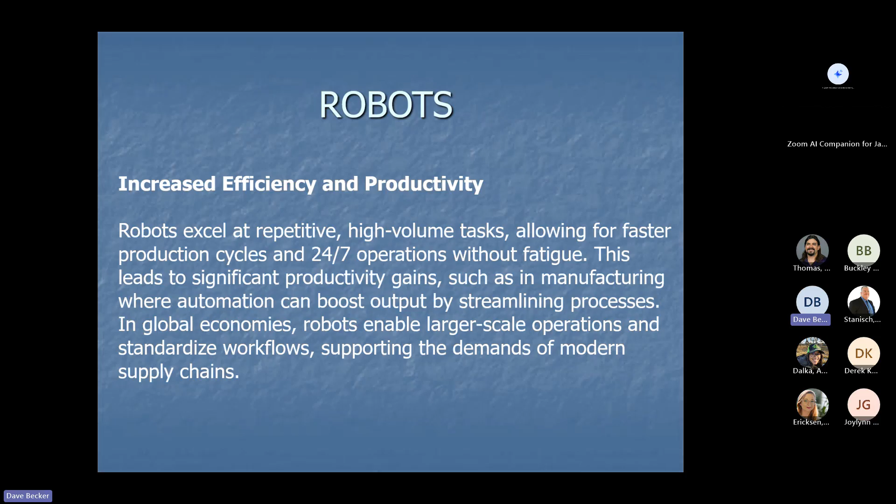And we're not only seeing automation and robots in this, but we're also seeing it with lasers as well now too. Many companies now have what they call lasers that run lights out. So they can program a laser to cut material over the weekends because the laser can now efficiently cut the parts, clean the table, and put a new sheet of metal on and go from there. So we're seeing more and more of this after-hours operation, if you will, in robotics as well.

Improve accuracy, quality, and consistency. Unlike humans, robots perform precise actions with minimal errors, reducing the defects and the waste in production. This results in higher quality products from electronics to pharmaceuticals. Their reliability ensures consistent output, which is crucial for industries like the automotive assembly plants in Detroit and around the world.

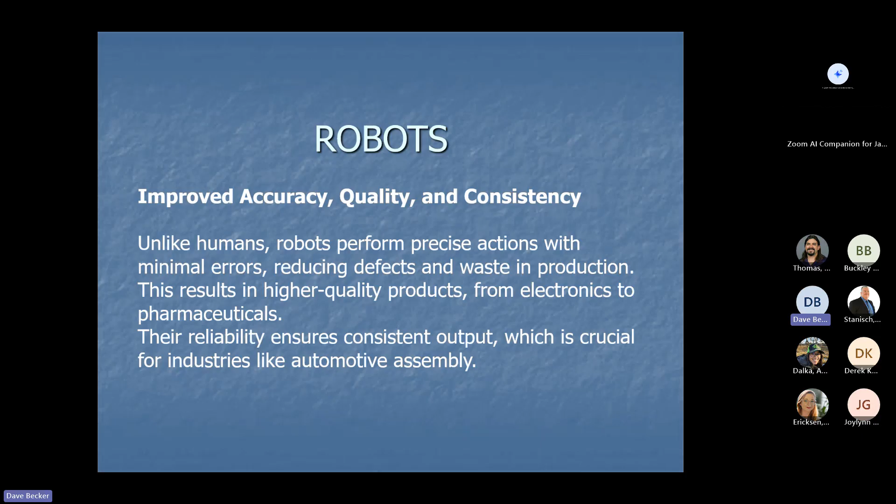Cost savings and economic growth. By lowering labor costs for routine work and minimizing material waste, robots reduce overall production expenses, which can translate into lower prices for consumers and broader economic benefits like shared income gains from capital investments. On a societal level, robotics drives economic expansion by cutting costs, increasing output, fostering job creation in tech and maintenance roles while spurring innovation.

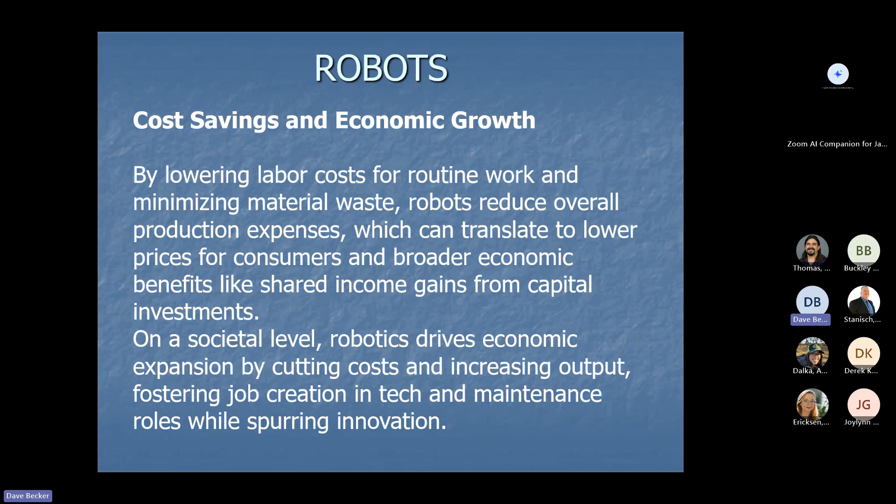So one of the ways that we do see this quite a bit is we hear from customers or people in the industry saying, hey, the robot's going to take my job. And actually, what ends up happening in most situations is the robot does perform the welding tasks or whatever that may be a lot faster. And we're finding that they need more people on the front end loading or on the back end unloading because the robot is moving so fast. So actually robotics, as we have found, has created more job opportunities.

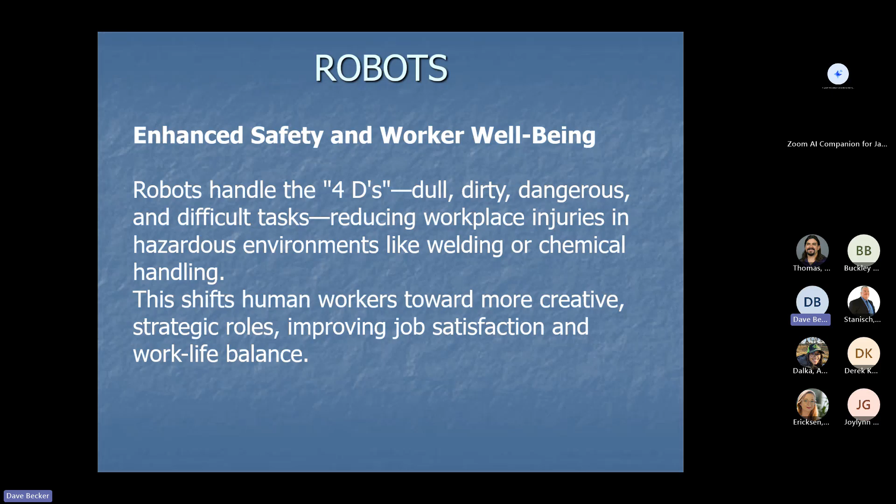Enhance safety and worker well-being. Robots handle the 4 Ds, which is dull work, dirty work, dangerous work, and very difficult tasks. Reducing workplace injuries in hazardous environments like welding or chemical handling. This shifts human workers towards more creative, strategic roles, improving job satisfaction and work-life balance. And like I said, this is where robots can get in and do the dirty work that was not fun for an employee to do in the past.

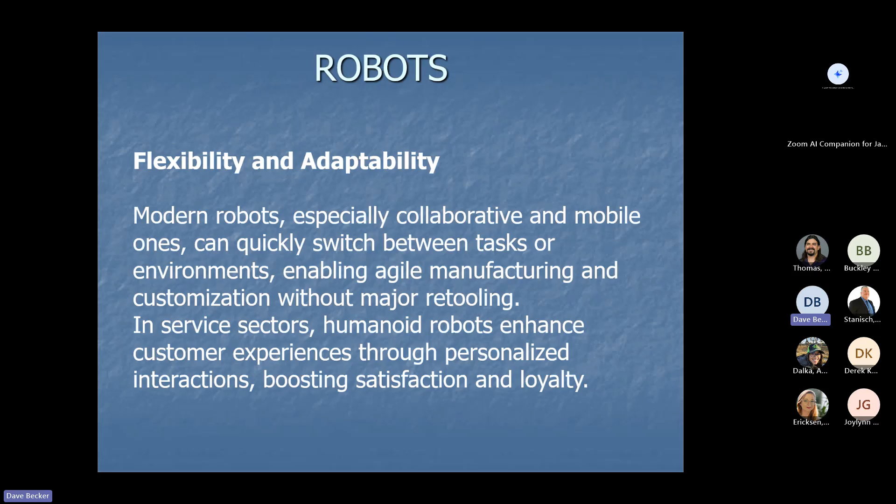Flexibility and adaptability. Modern robots, especially collaborative and mobile ones, can quickly switch between tasks or environments, enabling agile manufacturing and customization without major retooling. In service sectors, humanoid robots enhance customers' experiences through personalized interactions, boosting satisfaction and loyalty. So we're seeing more and more cobots doing material handling type stuff as we get further into the age of robots.

On a broader societal and environmental impact, robots contribute to sustainability by optimizing resource use and reducing energy consumption in operations.

We see a lot more of robotics in healthcare, in surgical precision. We're seeing it more in agriculture now for planting and the right amount of fertilizer, and quality of life globally.

While robots displace some routine jobs, their net effect is often positive when paired with reskilling programs. Adoption continues to grow with projections for even greater integration by the year 2030.

We do have one customer of ours, a very large customer, that would like to be, by 2035, 40% manual welding and 60% robotic welding. They feel that's where the market is taking them, especially with a lack of finding people that want to still do welding in this industry, in manufacturing.

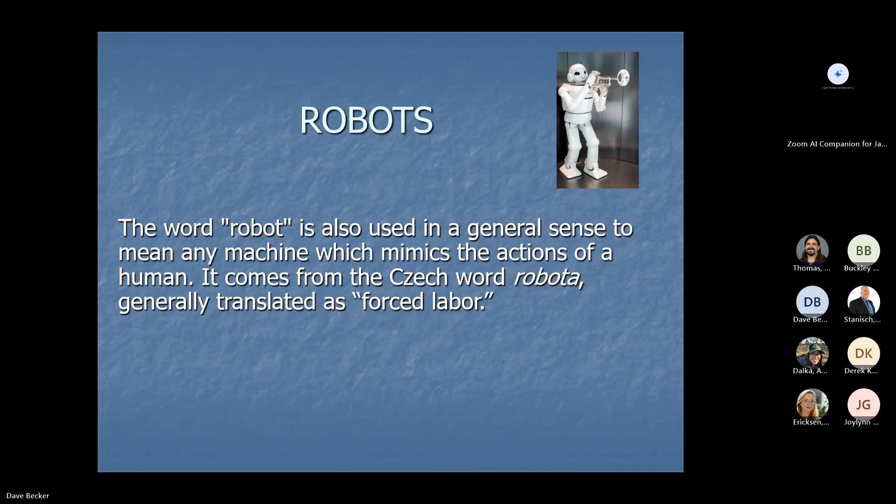The word robot is also used in a general sense to mean any machine which mimics the actions of a human. It comes from a Czech word, robota, generally translated as forced labor. So that's where you get the word robots from.

Most robots are designed for heavy, repetitive manufacturing work. They handle tasks that are difficult, dangerous, or boring to human beings. Robots are designed to do the same thing over and over again. So it's all about repeatability, welding that same joint time and time again.

For example, a robot might twist the caps onto a peanut butter jar on an assembly line. To teach a robot how to do its job, a programmer guides the arm through the motions using a handheld controller, which we call a teach pendant. The robot stores the exact sequence of movements in its memory and does it again and again.

So it's all about repeatability, and that's where we see the greatest success in a lot of applications where we put robotic welders in or material handling type stuff.

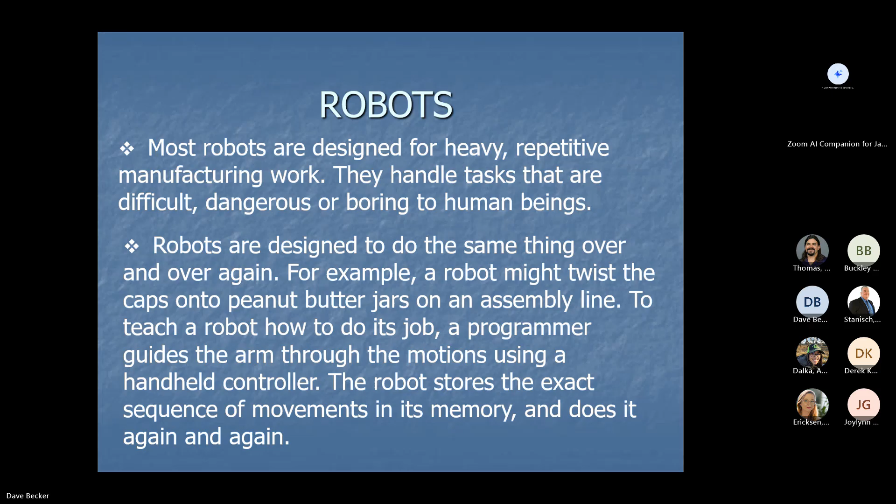Most robots work in auto assembly lines, building cars. Robots do the work more efficiently than human beings because they are so precise. They always drill in the exact same place every time, and they always tighten bolts with the same amount of force, no matter how many hours they've been working. So like I said, it's all about repeatability.

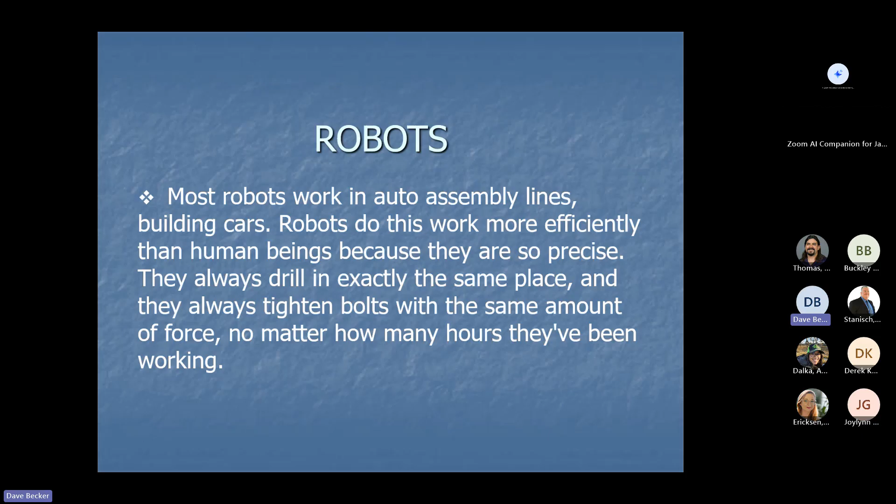So how robots kind of work: an industrial robot with 6 joints closely resembles a human arm. It has the equivalent of a shoulder, an elbow, and a wrist. Typically, the shoulder is mounted to a stationary base structure rather than a movable body. This type of robot has 6 degrees of freedom, meaning it can pivot in 6 different ways. A human arm, by comparison, has 7 degrees of freedom.

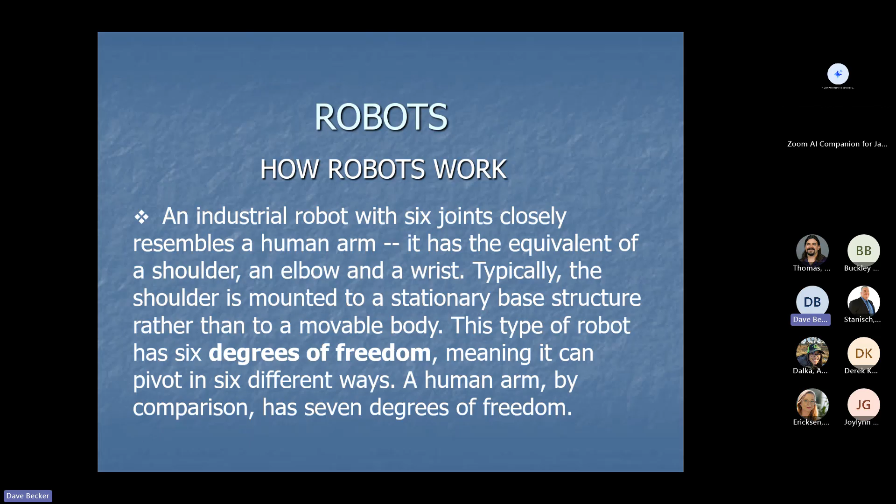A robot's servo motor, which is kind of what I would call the joint, often just called the servo motor in robotics, is a compact electromechanical device that provides precise control over angular and linear position, velocity, and acceleration. It's widely used in robots for tasks requiring accurate movement, such as arm joints, grippers, or camera pan tilt mechanisms. So the servo motors are very critical in robots, and you'll see some examples here.

I'll show too of how they precisely move the different sections of the robotic arm into place and in the same spot every time.

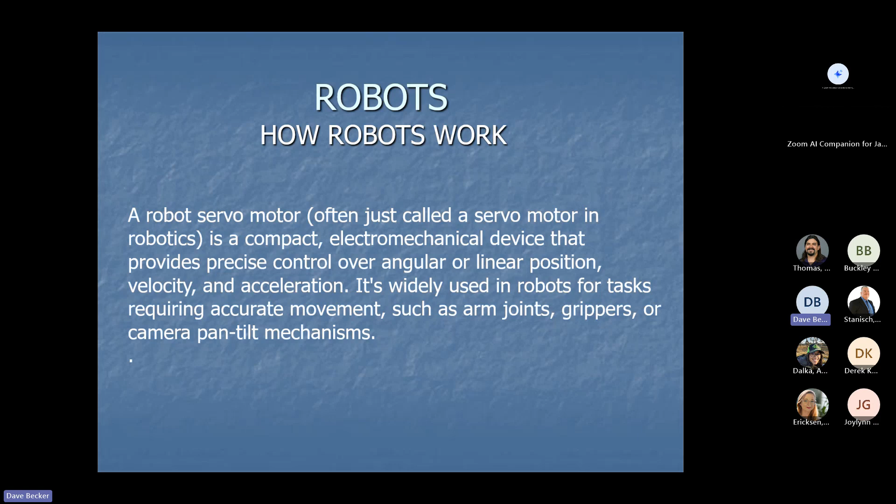Here's some quick stats on robots as of the end of 2024. Approximately 393,700 industrial robots were operational across U.S. factories, representing about a 3% increase from 2023, when the total stood at about 382,000 units. For context, new installations in 2024 totaled 34,200 units, about a 9% decline from the prior year, but still the third highest annual total in the U.S.

We did see a little bit of a slowdown. When we see a slowdown, we're not getting quotes out as much or seeing people looking for quotes as far as robots or automation goes. However, when those slowdowns happen, larger companies will take that opportunity to key up their automation process and make their processes better or more efficient during that slow time.

We have seen a considerable increase in 2025 here for MWSCO on robotic cell installations. So we are seeing an increase, but we also believe that a lot of this is being driven by the decrease of available workforce.

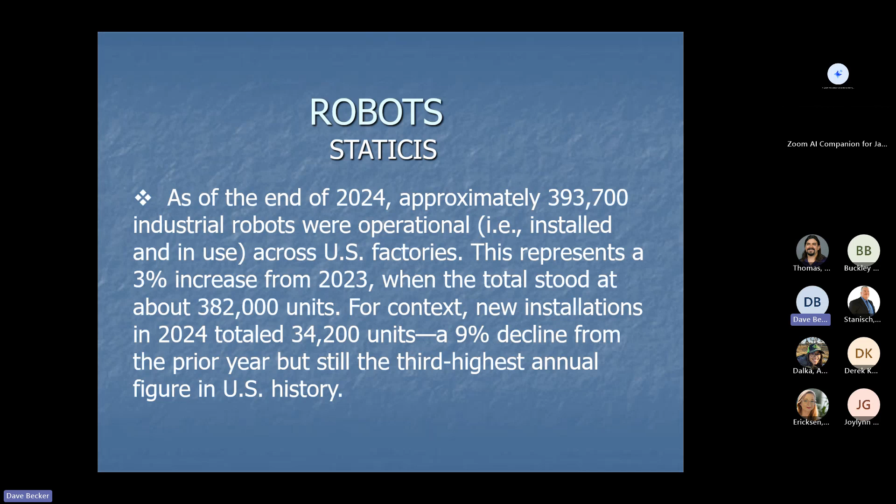So, key trends: growth over time. The U.S. operational stock has more than doubled in the past decade, driven by sectors like automotive, ag, and fabrication, which accounted for about 40% of 2024's installations, along with electrical and electronics. Global comparison: the U.S. ranks third worldwide in operational stock, trailing China with 2.02 million units, and Japan.

China installed nearly 9 times as many new robots as the U.S. in 2024. From a regional note, these figures focus on the U.S. Broader Americas installations reached 50,100 units in 2024, down 10% year over year.

You'll see that a lot of the arms that I'll show you here in the next picture are based over in China or Japan, the companies are. That seems to be the honey hole, or the sweet spot, where a lot of these arms are based out of.

So here's a few pictures of some different manufacturers of robots. ABB, Fanuc, Motoman, which is Yaskawa, that is the brand we do most installations on. You'll see Panasonic, there's also ESAB. Lincoln works with Fanuc, so that's kind of one and the same. Miller has ATP, and then there's OTC and Kawasaki that are out there as far as robotic arms go.

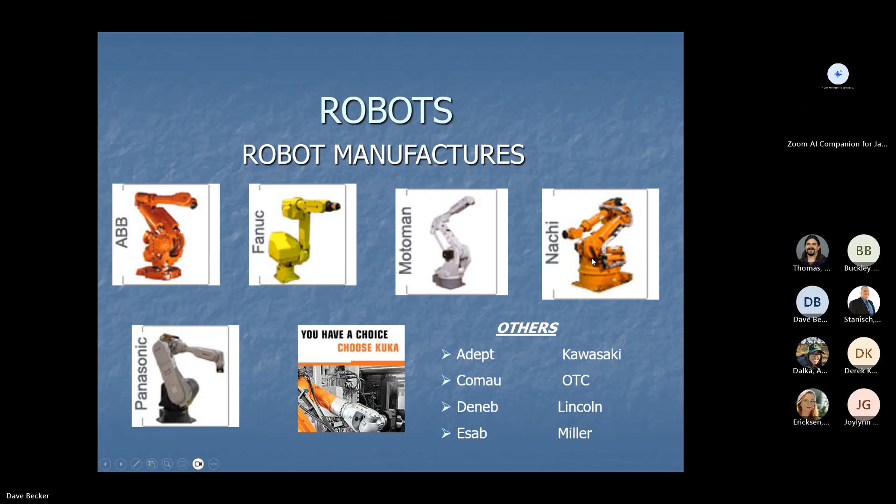So when you have a robotic arm, you have some other components that are part of the cell that you'll see. Different components are used in different ways depending on what you're trying to accomplish, whether you're welding something and what that part looks like, or how you're trying to complete the project, or load it. So there's a couple different fixtures.

The first one is called a rotating fixture, or it's also called a Ferris wheel, which you'll see - I think I have a couple videos here at the end that'll show you a Ferris wheel. So that's the first one, the rotating fixture.

The next one over to the right is what I call a headstock tailstock. Basically it's got two servo motors on either side, and that spins around and moves the parts around. The reason for this is welding is more optimal when you can weld in what we call in position - not vertical up or vertical down, just flat horizontal. So that headstock tailstock allows you to put the weld in what we call an in-position weld.

The next one to the right is a Genesis - I call it a Genesis, but it's a turntable. It will weld on one side, and the screen will protect the operator on the other side. He'll load the parts in, it'll spin around, and then he'll unload the part that's been welded. While he's unloading and reloading again, it's welding on the other side.

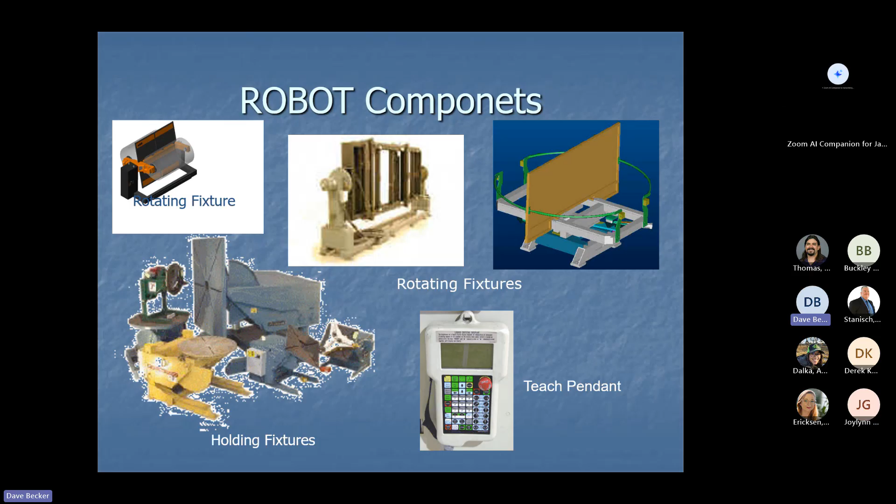So 10 years ago, 9 out of 10 robots were being bought mostly by automotive companies, by Ford and GM and so on. Now only about 40% of the robots made are bought by car manufacturers.

So here's some typical applications where we're seeing robots being used: spot welding or resistance welding, which I'll show you in a video hopefully. Obviously arc welding, we see it in plasma cutting, we do see it in plasma welding, which is actually used for equipment in the medical field for angioplasty.

Any type of metal transfer - what I mean by that is sometimes it's hard facing or coating of a material - bonding and sealing, laser welding. Laser welding is becoming more and more popular; we're selling a lot of laser welders as of late, and they're going into robot cells as well. Laser cutting, flexible automation, and one I just saw a few weeks back was brazing copper pipe - Lincoln Electric has developed a robot that will do brazing for copper pipe. So that's something new.

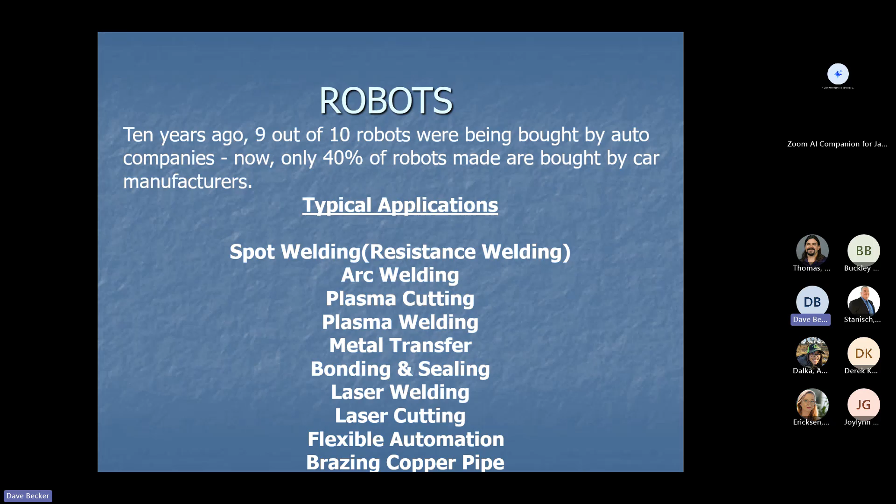So robots have advantages and disadvantages. Obviously the advantages - they are flexible, they are accurate, and they save space. But the disadvantages - they must be programmed and changed each time the program changes different products. Most applications require some type of fixture like we looked at before, and require skilled personnel to be able to do what we call touch ups.

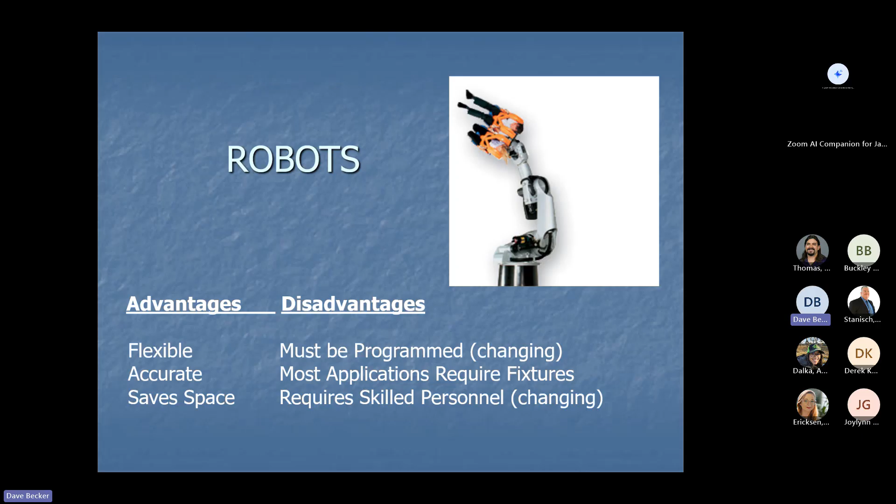Sometimes there's some brush ups that need to be done on programming and stuff. We're finding though that a lot of the people that are good welders make good operators for robots. They know what a good weld looks like, they know what a good weld sounds like, and they're able to use those talents to program the robot. So it's kind of morphing into a different area for welders.

So here are some installations that we have done. This first one is a smaller installation. If you can tell on the first picture on the left, the robot has two stations: one on the right that's closed up right now, and one on the left. What the robot does is weld on one side of the station while the operator loads the other side without getting any arc flash or arc burn. You can see the inside of it in the next picture, from inside the robot arm.

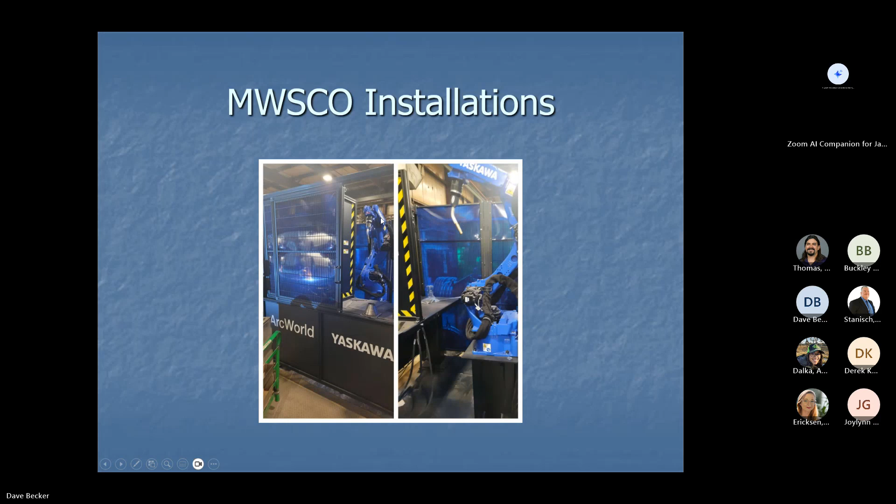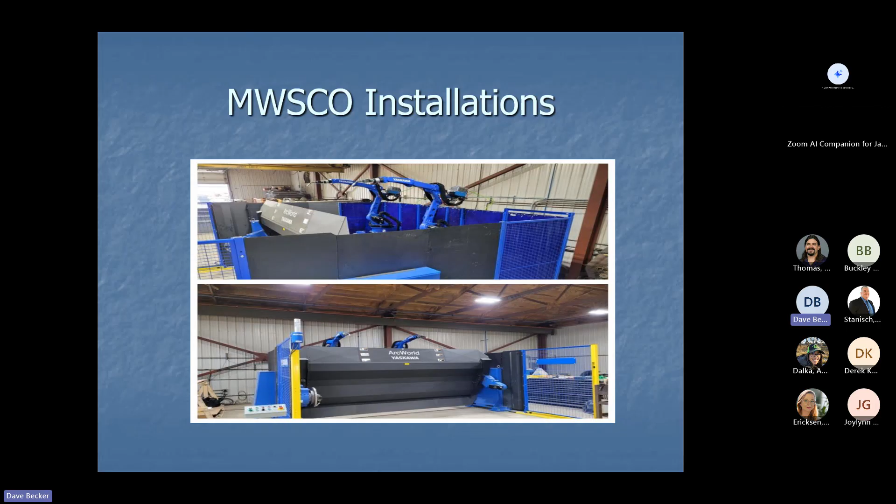This particular one is called a tandem arm. This installation took place, I think, out in Delano, Minnesota. Basically, the weldment or fixture is so huge that the arms cannot reach the whole piece, so they use two arms in that cell to weld all the joints that need to be welded. Then where you see ArcWorld, that rotates around - that's the Ferris wheel, and you'll get to see that in a video here. This is a very complex system because it takes coordinated motion with the two robot arms to make sure they don't collide with each other while welding. The programming is unique, but when they work, they're fun to watch.

This was a large installation that we had. On the left is what's called a sky hook, which is a positioner. That sky hook is holding, I believe, about a 40,000 pound piece that needed to be welded, and it can move around - it can actually rotate 360 degrees all the way around if needed. Then the robot arm itself is on a rail system that moves back and forth to weld the weldment, since it spanned that whole area when mounted on the sky hook. The picture below shows the operator station, the controller, and the power source, which provides power for the welder itself.

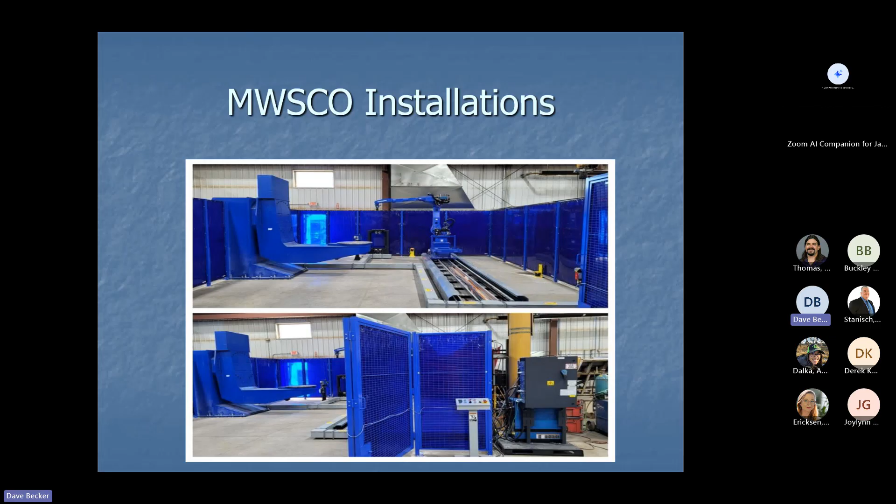This one here is basically a dual setup. The first picture we saw was a very small footprint of a robotic welder; this is on a much larger level. This was in our automation center. There are two sides, an A side on the left and a B side on the right. Each side has what we call a headstock and tailstock, so the weldment can sit inside and be welded. While one side is welding, the operator is loading parts on the other side. Once it's completed, the operator moves over, takes the completed weldment out, and puts in the pieces that need to be welded.

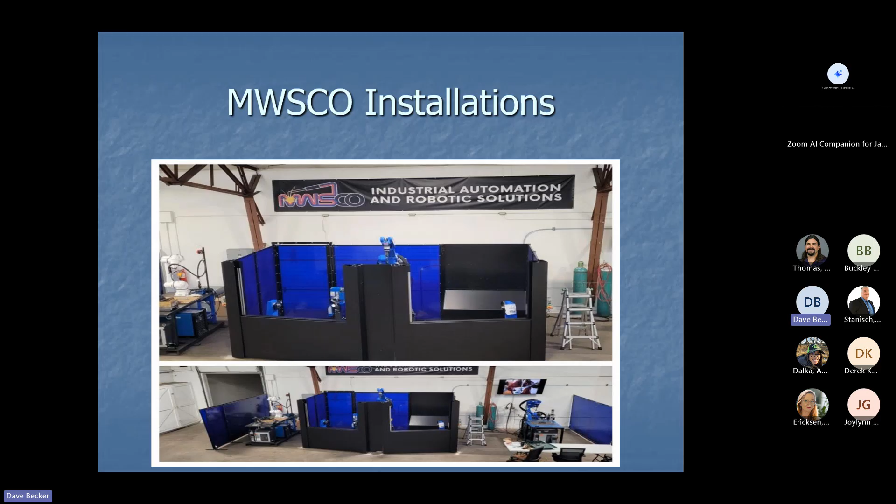This is what we were talking about before with collaborative robots. Everything I've shown you so far is what we call high-speed robots. These are cobots that can be used for welding. In this situation, they're welding, putting a weld around the outside diameter of that pipe.

Collaborative cobots - I'll just call them cobots. We've sold some for material handling. We've had situations where a customer wanted to feed material into a brake press and have it bent, and they were short on help. So the robot would grab the sheet of metal, move it into the brake press, release it, let the brake press do its thing, then go back and pick up the piece of metal, readjust it, let the brake press do it again, then pull it off and stack it.

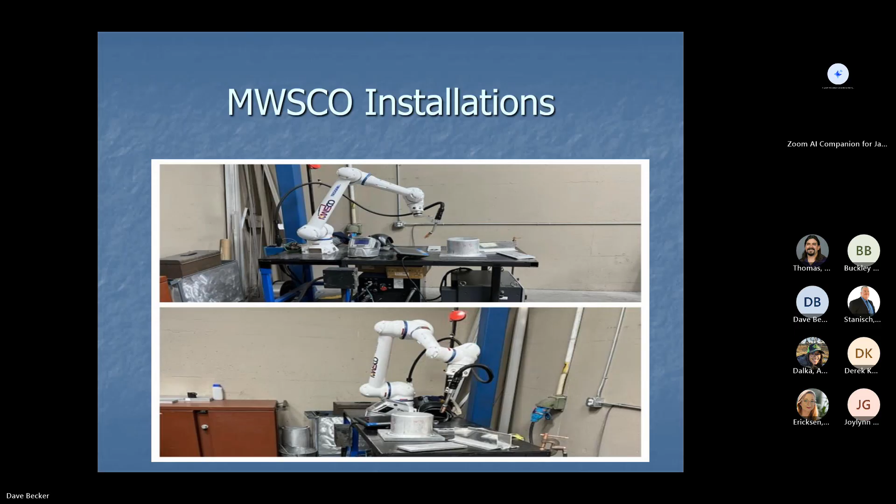And I'll take questions here. I just want to show you a couple of things here if I can. So I'll try to do this.

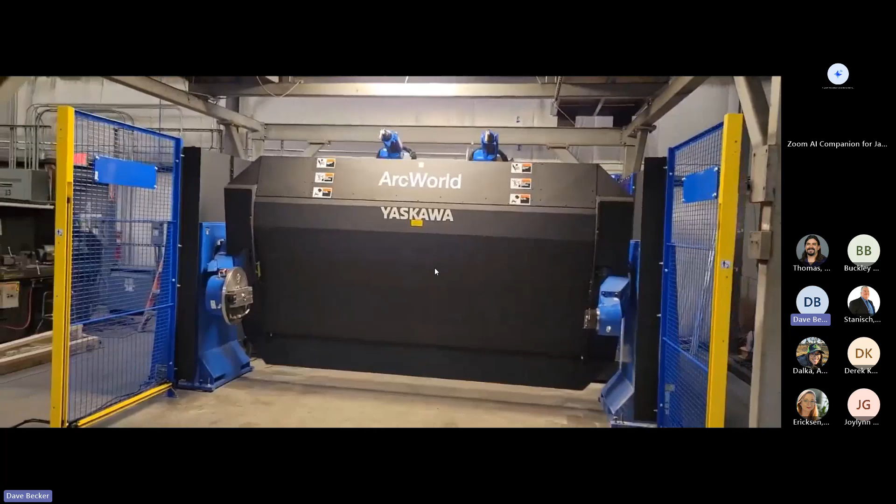This is the ArcWorld that we were talking about with the Ferris wheel.

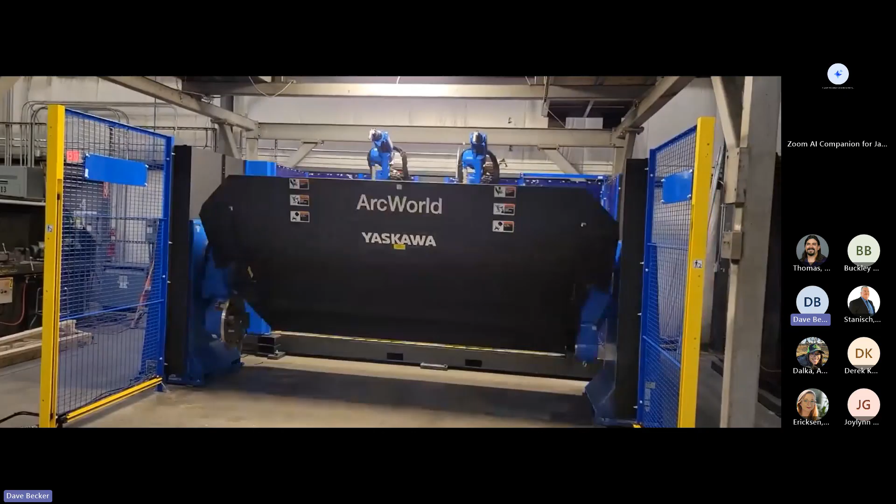So you can kind of see there where the twin arms are moving back and forth. The guys that program this, they like to have fun, and they call it dancing with the arms. So sometimes they get bored. And then the other one, if I have the other one, here we go.

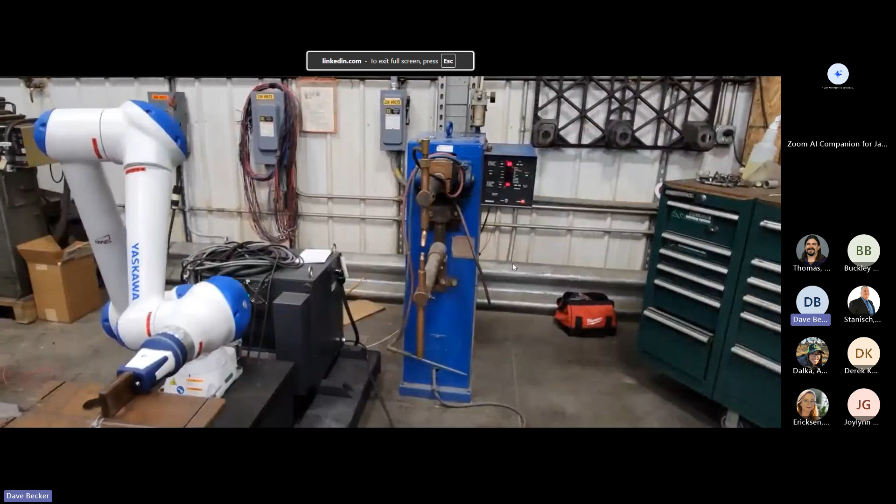So here's one where we're doing spot welding with the cobot. This is the material handling situation. So it puts it in there, it does the spot weld, then it pulls it out, and it'll do it on the other side here. So that's where we're seeing a lot is with that.

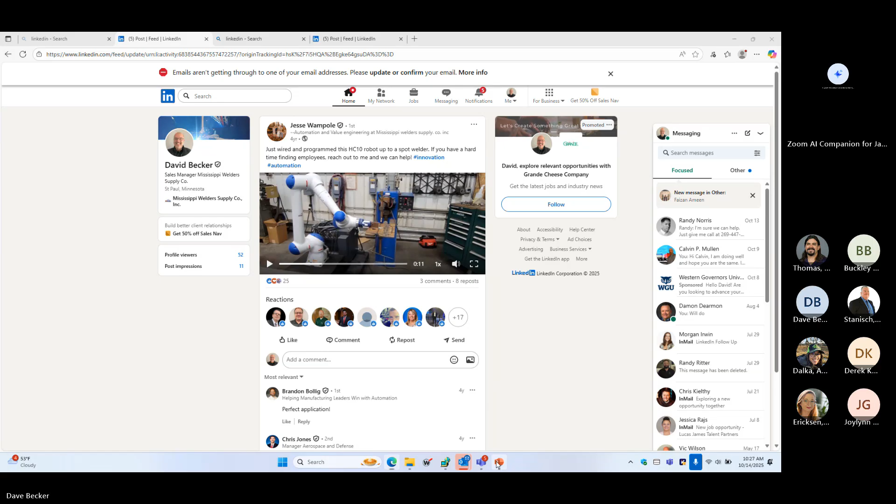Hold on, I need to stop that. So hopefully you saw those okay. So does anybody have any questions that I can try to answer concerning that or with robotics?

So Dave, what are the characteristics of the best installations applications that you've seen? If we're thinking about doing something robotic with welding, what should we be looking for?

So usually, like I said, it's that dirty work, it's that not so fun work. The best we look at cycle times. So how can we take a product, maybe it's got a lot of long welds on it, or it needs to be adjusted manually. We take a look and we try to improve cycle times.

So an example that might help is I worked with a customer that was building hydraulic tanks, and they had probably about 12 to 14 hours of weld time into this tank. And there was a lot of welds, a lot of long welds. Then the operator had to adjust the tank repeatedly many times to get it in position. So we took it from 12 to 14 hours, and the robot did it in like an hour and 20 minutes.